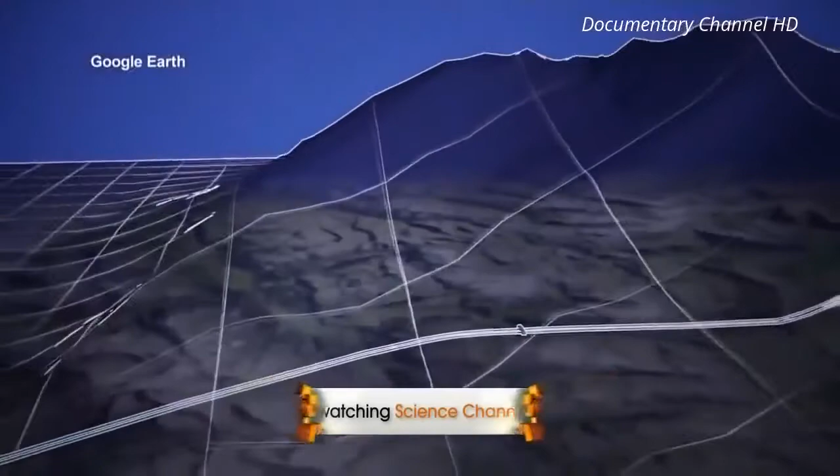My name is Danny Forster, and this is Build It Bigger. I've spent years traveling the globe, investigating some of the world's most important construction sites. But right now, I'm going to take you 6,000 feet under the Swiss Alps into the world's longest tunnel. The Gotthard Base Tunnel, the most ambitious tunneling project ever attempted, cutting 36 miles through one of the world's largest mountain ranges. Two teams are working through one of the most dangerous geological zones on the planet.

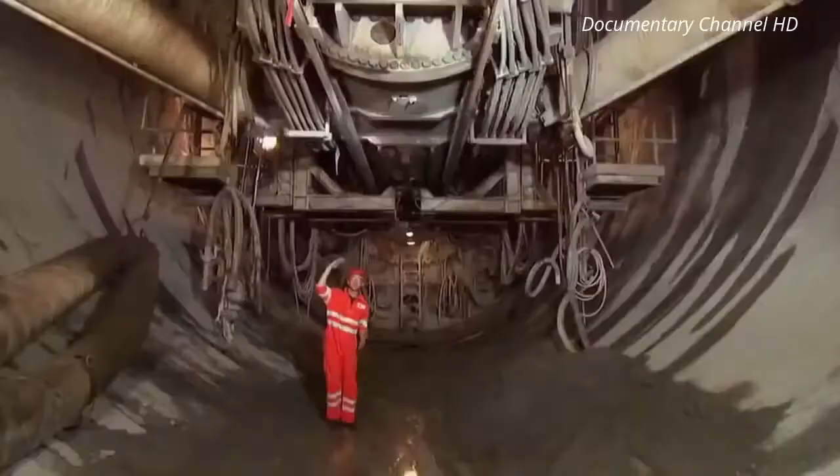If you encounter some bad geology halfway through, it's not like you can go around it. No, you have to go right through. On the one hand, tunneling with one of the biggest machines ever built. A 30-foot tall drill bit that is mining right through the earth. And on the other, blasting through 7,000 tons of rock each day. All right, so the charge is in, and we're gonna blow the crap out of this wall.

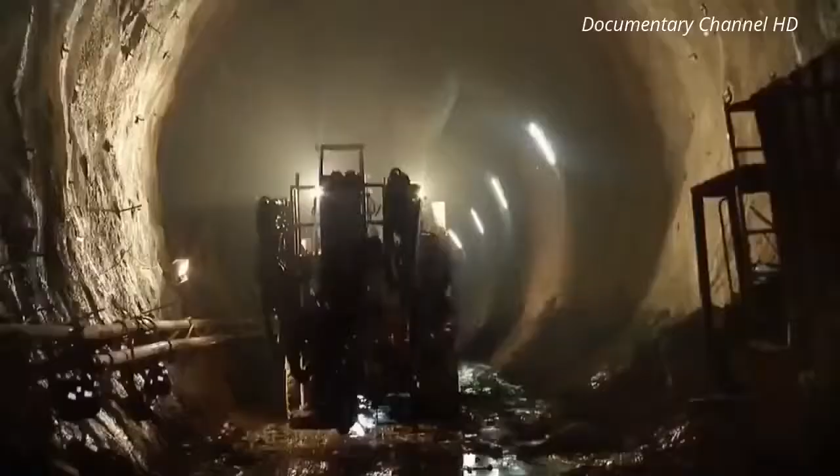After 12 years and 34 miles of digging, they're just 4 months away from the final breakthrough, revolutionizing transit through the Alps forever. I'm in Switzerland, famous for its handcrafted timepieces, milk chocolate, and political neutrality. But more importantly, Switzerland is the geographic epicenter of Western Europe. 2/3 of all freight sent between Northern Europe and Italy is transported through this tiny country, just half the size of the state of Maine.

But despite its convenient location, Switzerland is a geological anomaly. Over 65% of the entire country is covered by the second largest mountain range in the world, the Alps. With soaring peaks over 15,000 feet high, the Alps form a 700-mile-long barrier between northern and southern Europe. And at present, the only way to get from one side of the country to the other is up and over the mountains.

To scale the Alps today, trains climb over 5,000 vertical feet, slowly weaving through sharp curves at just 40 miles an hour, a quarter of their top speed. This steep route also forces trains to operate at half their capacity, despite freight demands growing by 75% each year. With Switzerland becoming the economic conduit between northern and southern Europe, there was an absolute need to find a way to not go over the mountains, but right through them.

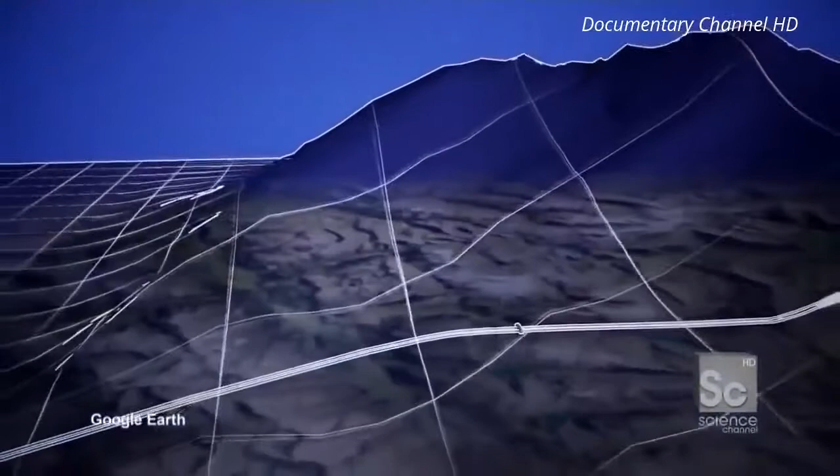Switzerland has launched the most ambitious tunneling project ever attempted, 6,000 feet under the Alps. The Gotthard Base Tunnel will be the longest in the world, stretching 36 miles from one side of the Alps to the other, more than 4 miles longer than the tunnel connecting England to France. When complete, the tunnel will consist of 2 parallel tubes, each 30 feet in diameter. Soon, high-speed trains will cut straight under the base of the Alps for the first time ever, doubling the current freight capacity and dramatically changing transportation through Europe.

I mean, it's more than just making freight move more quickly. Exactly. Alps and mountains are part of the Swiss identity, but it's something that blocks us from the south. And for centuries, people have looked to have a fast way through the Alps. And it's not only about transportation, it's also a cultural exchange.

It brings regions together. To build this revolutionary route, 2,000 workers have excavated 24 million tons of material, enough to build the Great Pyramid in Egypt 5 times over. After 12 years and 34 miles of digging, the tunneling teams have just 2 miles left to go. They'll meet up under the deepest part of the Alps, 6,000 feet below the surface.

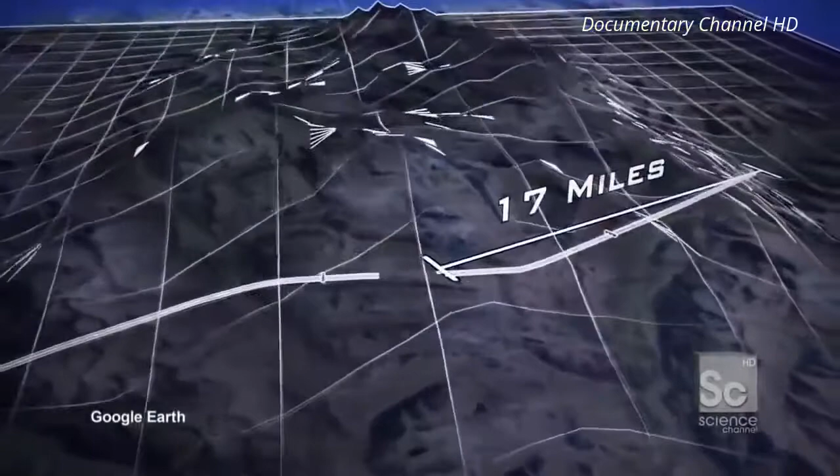And today we're headed 17 miles from the southern entrance, where one team has encountered some of the hardest rock on Earth. Now we're about to begin a 45-minute journey in that train, deep into the tunnel, to the very active edge of where the tunnel's happening. It's kind of freaky, really. Okay. And we're off.

Tell me about where we are in the tunnel relative to where we are in the mountain. We're now basically under the main ridge of the Alps. The pressure from the mountain overhead creates one of the toughest rocks in the world, granite. 6 times harder than concrete, it's what's slowing down the tunneling team. So the length of the tunnel, the height of the Alpine mountains, the rate at which you have to build that, all of that has come together to sort of create a situation that's unprecedented for tunneling.

Yes, the challenges that we had here on this project will actually probably never happen again. No one's been at these depths in the Alps before. No, I mean, we never know where we're going. We're like astronauts. We're putting our foot every day on a rock where no one has ever been before. Well, after about a 45-minute train ride, it's time to go to work. All right, we're here.

So although it's a little bit hard to tell, although it looks like I'm on some big metal rig, this is the TBM. This is the tunnel boring machine. This thing is 1,200 feet long from the back to the front. And essentially, this is what it's all about. A 30-foot tall drill bit that is mining right through the earth. One of the biggest machines on the planet.

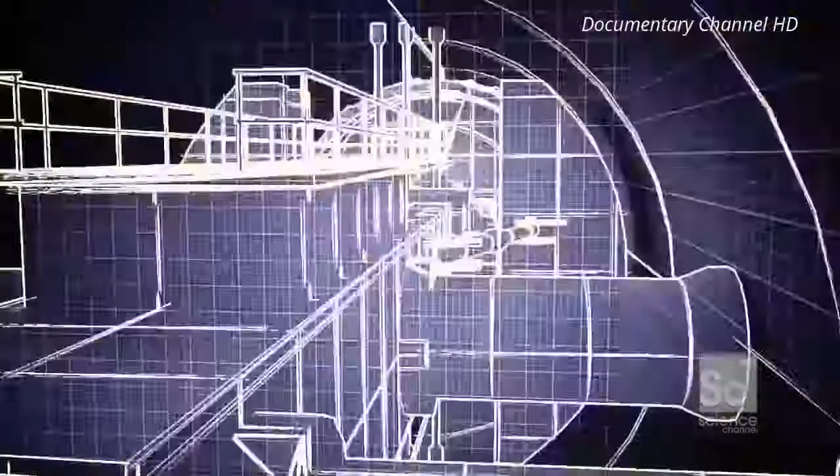The TBM is a 3,000-ton drill as long as 4 football fields. It bores through the mountain with a 30-foot tall rotating cutter head that pushes against the tunnel face, crushing the rock, advancing the tunnel an average of 90 feet a day.

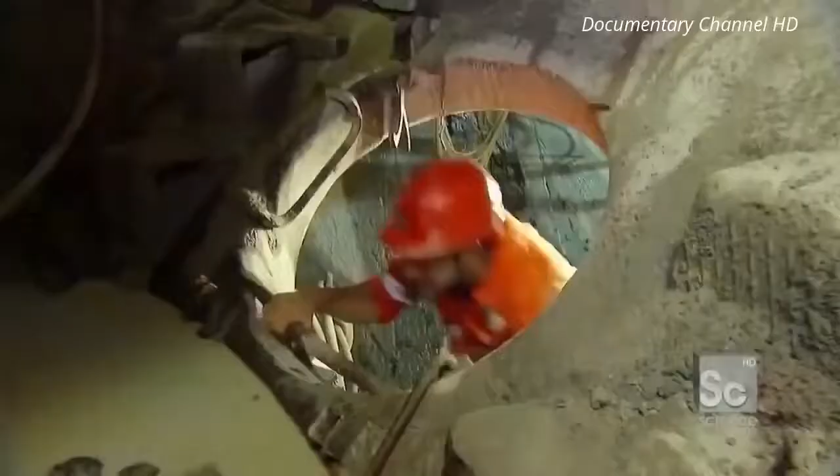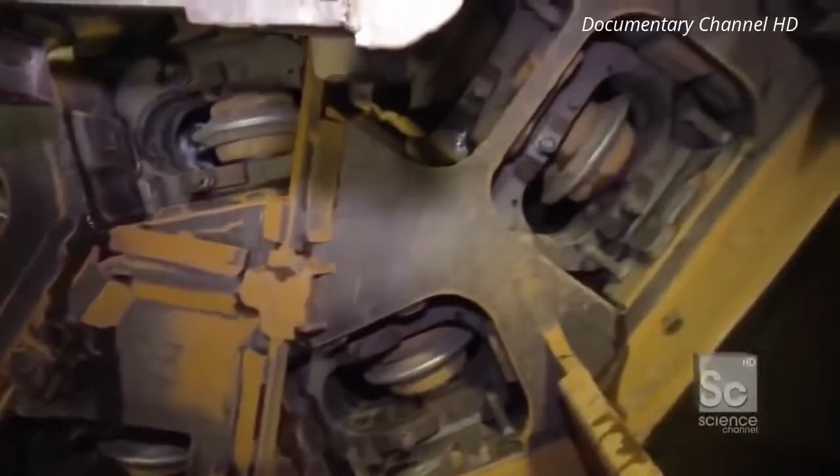All right, so now I'm actually inside the chamber, directly behind the cutter head, and if you look right over here, those are the cutters. Those are the actual rotating devices that are making contact, physical contact, with the front of the tunnel. The 66 disc cutters located at the front of this TBM shear off more than 7,000 tons of rock each day. They've been boring through the granite for 18 hours straight, and they've become worn down.

Now, if the sharp edges are worn more than an inch without being changed, it can slow the TBM from a maximum of 120 feet a day to just 9. The crew has to repair this battered cutter head before they can continue drilling. The question is, have they been worn out? Do they need to be replaced? And the man who can figure that out is Martin.

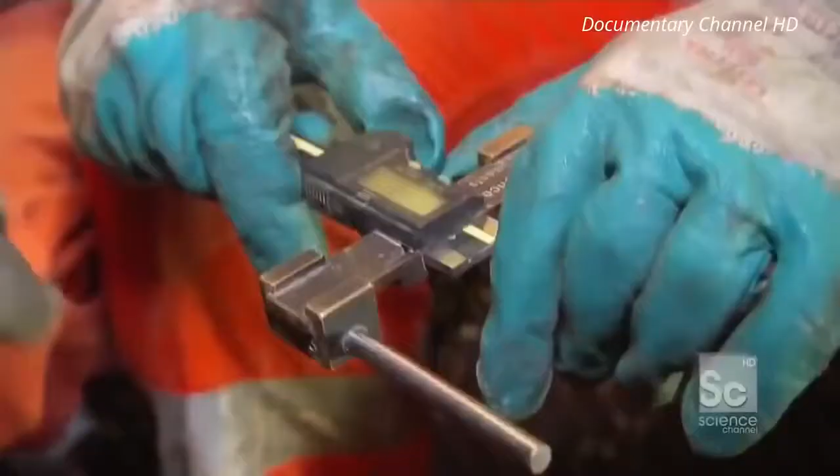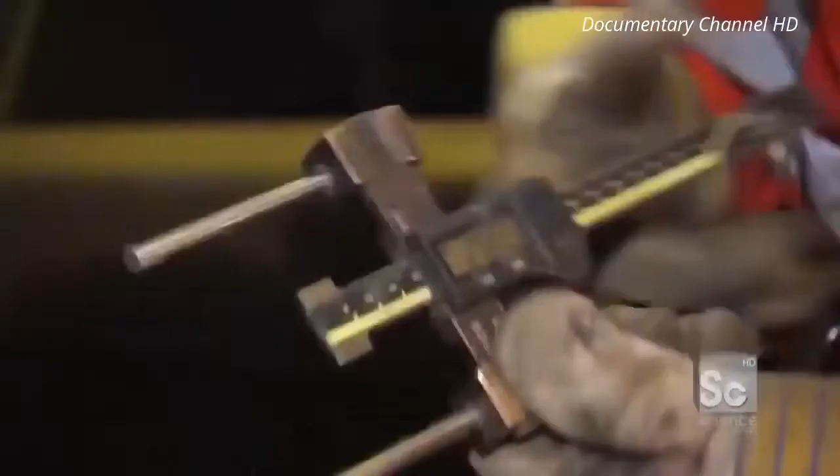Martin uses a specially designed caliper to measure how much of the cutter has been eaten away. If the reading is more than 25 millimeters, then the cutter's been worn down too much and has to be replaced. Myself and Martin are gonna climb into the cutter head, 30 feet tall, measure all 66 cutters, and find out what has to go, what can stay to get this machine back to mining. Not much below me. Good.

All right. The cutter head is as tall as a 3-story building, pushing through the granite with 26 tons of force. Look at him down there. The cutters wear down after less than 12 hours of drilling, 10 times faster than in softer rock. I'm going in to help you, Martin. Stay there, Martin, don't you worry. 16.3. Martin, how are you? Fine. You're good? We're now in the bottom of the cutter head.

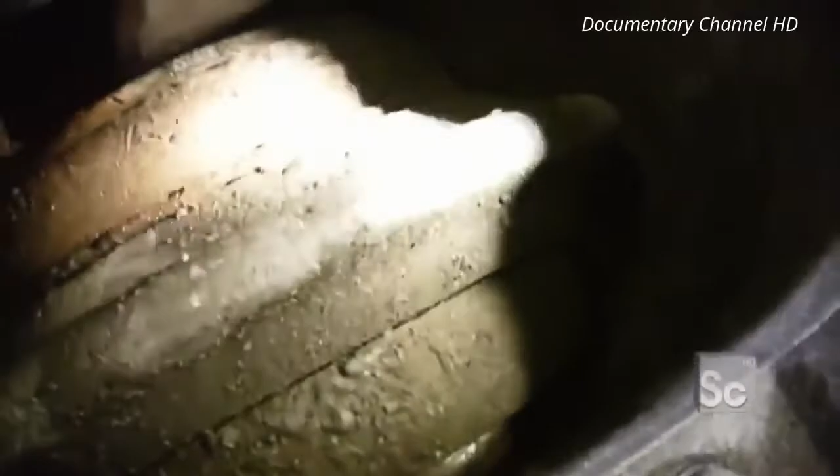I'm actually at the very underside of this 30-foot disc, and what we're here to check out is right there. There's the cutter right there, Mark. So let's measure this cutter head. All right, so now look, as the caliper extends, this is the whole point here. We look at that number, it's 18.3 millimeters, which means this cutter head of the 66 can remain on. To the next cutter. How much?

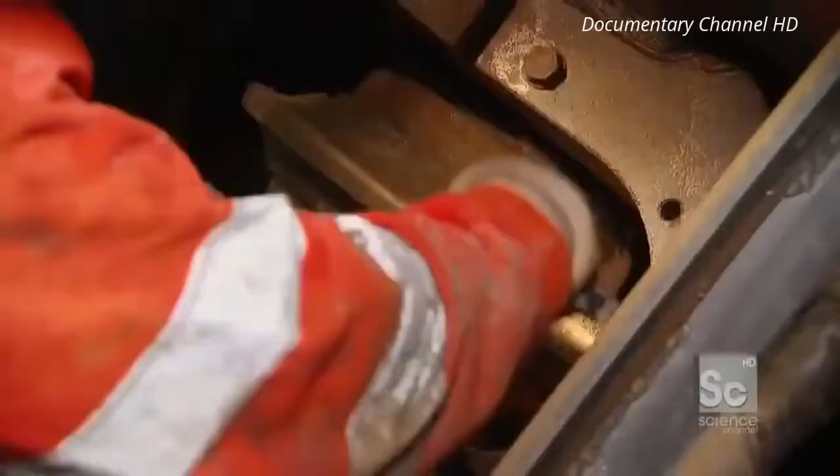4.8. 4.81, so we like that. That one's good. Next. 7.1. 7.1. Also an opportunity for joy. It's okay. It's pretty good, though. 7, it's good. Happy. This 20 good. Very good. I guess really when you're dealing with 66 different cutter heads, it's hard to get excited after each and every one. After measuring, we found that 3 of the cutters need to be replaced before the TBM can get back to work.

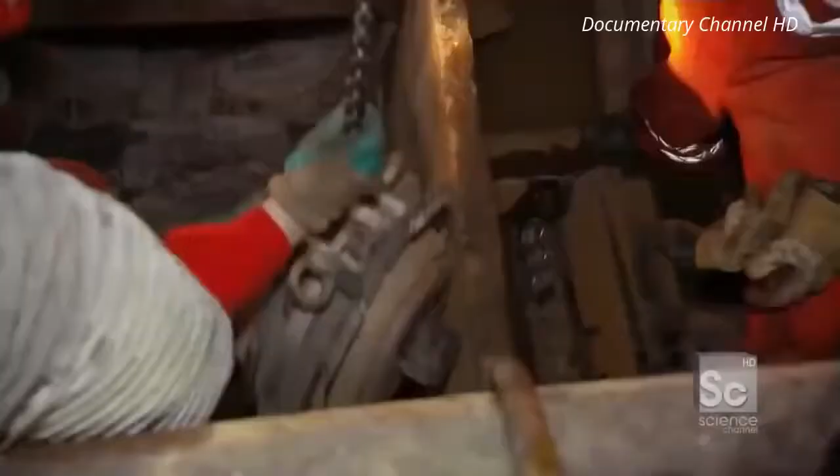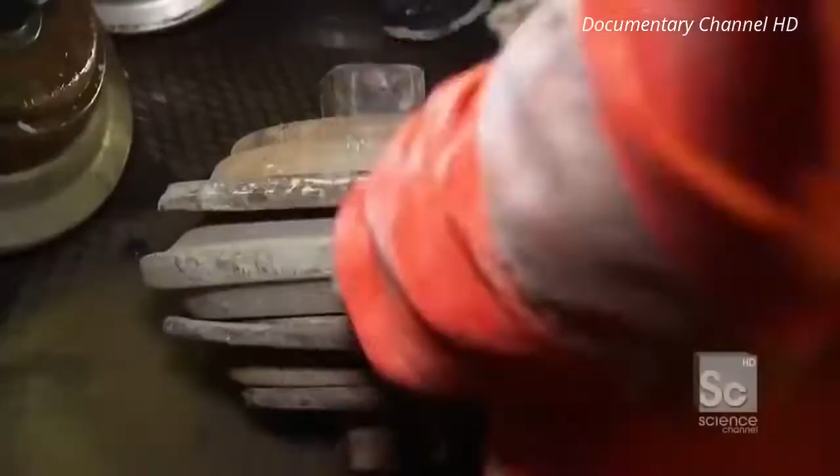So essentially what Martin's doing right now is taking out the old cutter head. Auf. Here it is. There it is, he's got it. There goes the old cutter. Over the course of the project, Martin has replaced more than 10,000 cutters. Each one is made of 300 pounds of solid steel, so the crew uses a hydraulic crane to maneuver them into position.

All right, and so this right here is the cutter. You'll notice the steel is at its full length, so this is the new stuff. Gotta get the old stuff out. It's basically like changing a tire, a very heavy tire. You know what I mean?

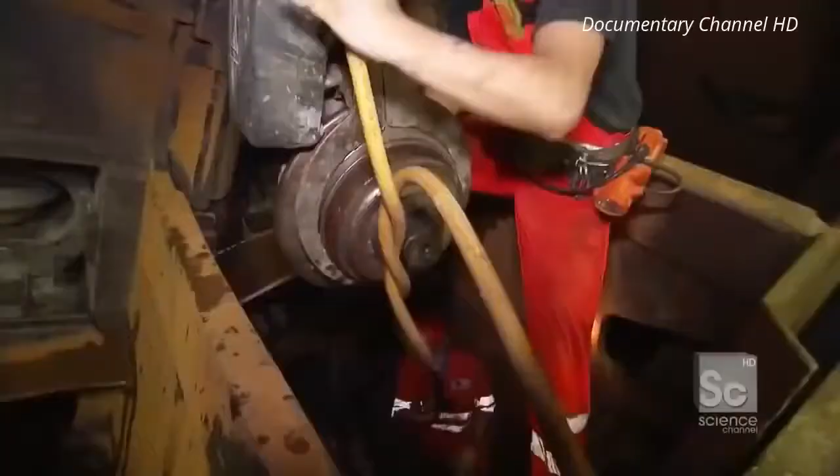So we've swapped the old one out. Next step is bringing the new one. And now it's about getting it to fit in the hole, which seems to involve Martin's feet. There it is. Nice. So he's generally gotten into place. He's now using a pry bar to wedge it over.

The cutter is specifically designed with just 2 bolts for fast installation, even in awkward locations.

Now Martin's shooting. Martin is now fully actually making the show by himself. Nice. Martin's now photographing his own work. Pretty good stuff. Martin, as far as I'm concerned, you shoot it, and then I'll do all the work.

It's incredible that there's 66 of these things, and you can imagine they're getting worn down constantly. And this is what it takes to just change out one cutter, in one unfortunately inconvenient location. All right, so the old one was taken out. Yeah? The new one is in.

Finished? Let's finish. You did good. You did good. You're a fast man. And now, thanks to his nimble hands and sort of perspicacity, this cutter head is ready to get back to work and start building this tunnel again.

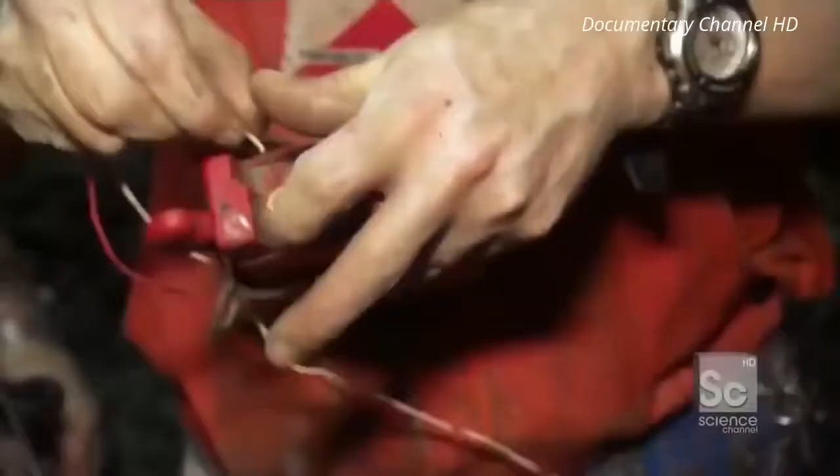Coming up, using 1,000 pounds of explosives to blast through one of the toughest mountains on Earth. This is like full-on, should I cut the red wire or the white wire situation?

The Swiss are known for being incredibly precise, whether it's their handcrafted timepieces or their famous train system, which, by the way, I can personally tell you, departs and arrives exactly when they say it will. And they're going to need that level of accuracy because the tunnel they're building is not just the longest in the world, but it also has to accommodate some of the fastest trains ever built.

Trains will pass through the Gotthard Tunnel at over 150 miles an hour. And at these speeds, even slight curves could cause a derailment. For tunneling teams on either side, this means digging a direct route through 36 miles of rock and meeting at an exact point 6,000 feet under the Alps.

I mean, how accurate do you need to be? We have a tolerance of 12 centimeters, which is this much, that we can use to meet. It's like a bow and an arrow, and you don't see the target, but you still have to be right in the target, right in the middle point. It's incredibly close, and you're shooting an arrow essentially blindly over a trajectory of miles. Yes. It's about 1.5 miles still left, yes.

And what I find to be so amazing is that you have a set beginning point, you have a set end point. If you encounter some bad geology halfway through, it's not like you can go around it. No, you have to go right through, and that's the main goal of this tunnel. You cannot change the geology.

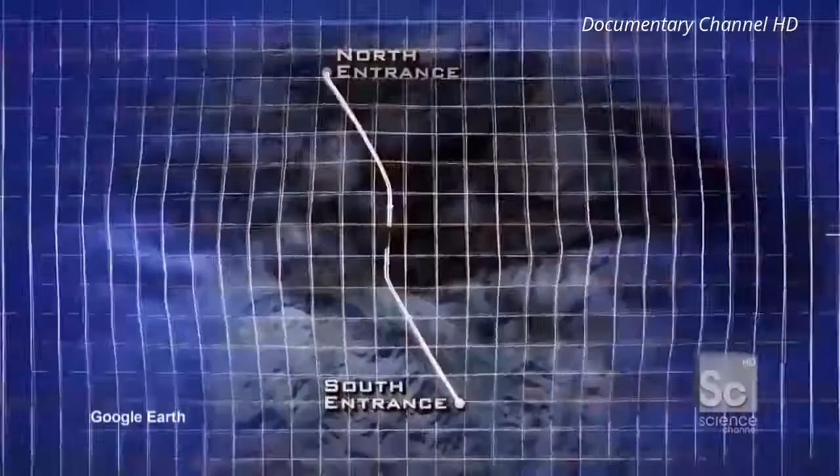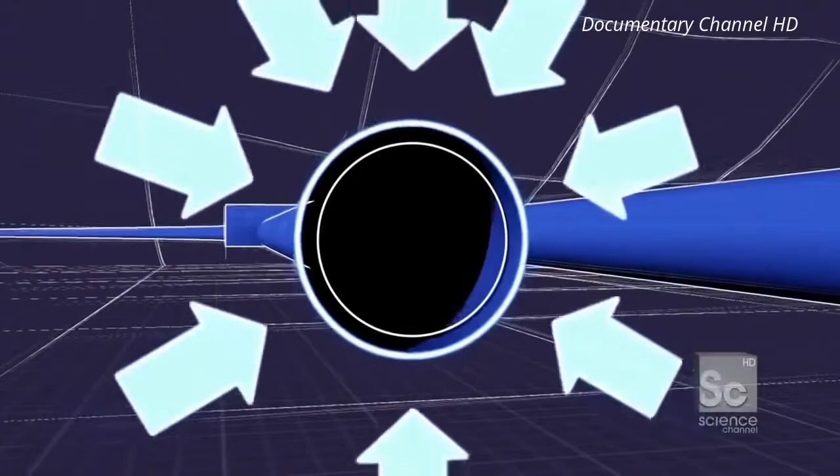Blasting away the rock is 10 times slower than using the TBM, but it's the only solution that'll work in this volatile area. The mountain's enormous pressure creates a squeezing effect, shrinking the tunnel's diameter by almost 3 feet, making it too small for future trains. Now, to prevent this, they're blasting a 3-foot wider diameter tunnel, allowing the rock to naturally squeeze down to the right size, matching the other side.

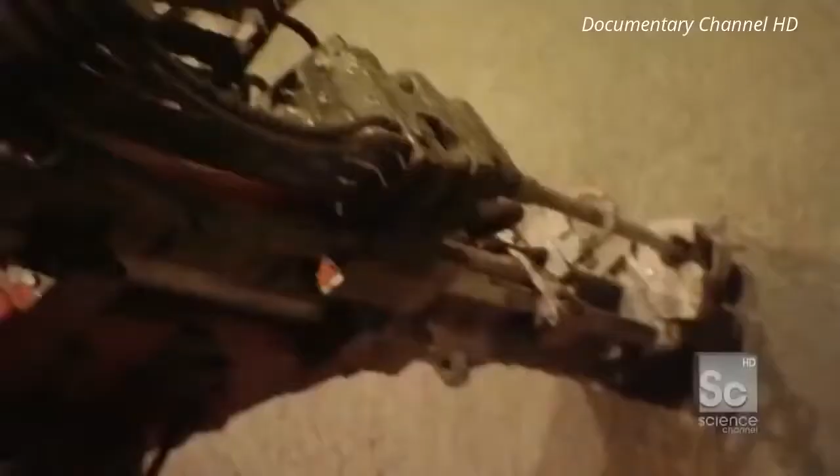So this thing is called a 3-boom Tamrock. Essentially, 3 different drill bits that can put as many as 120 holes into that wall. These holes are filled with ammonium nitrate, a liquid explosive that blasts away the rock, advancing the tunnel 9 feet at a time. Coming up.

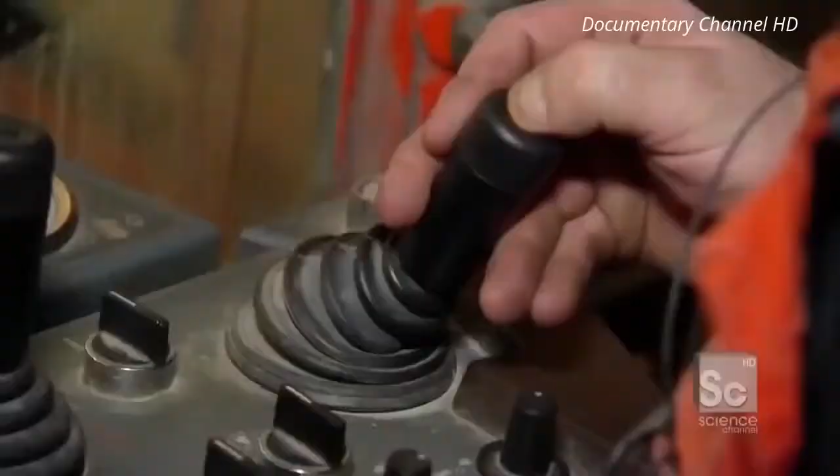Okay, so now I'm inside the cab of the 3-boom Tamrock, and it's this thing and this man right here that are actually driving this thing and supporting this rock face.

How are you doing? You're smoking. That's good. Because we're in a confined space in a tunnel with very little air. So you do? You're both smoking.

So actually, if you look here at the computer screen, it sort of sums up what we're up to. This is a cross-section of the tunnel right in front of us, and the goal is to locate 120 holes on this face and drill those holes, filling each one with explosives so we can push that wall out and grow the tunnel.

Are you smoking back there? This guy loves to smoke.

To precisely control the diameter of the tunnel, a surveyor pinpoints the location of each hole within an inch, evenly distributing them across the rock face. All right, so at this point, we're almost done. Almost all of the 120 holes have been drilled, and the next step is to load them, or in other words, fill them with liquid explosives.

So you can see the charge right here, right? It's essentially a small little bomb in my hand, and I'm gonna stick this in the very tip of my hose, right? We're actually going to shoot this hose with the liquid explosives and push this charge into the very back. Therefore, when the blast goes off, this charge will actually accelerate the blast, loosen more rock, and get us those 9 feet we need.

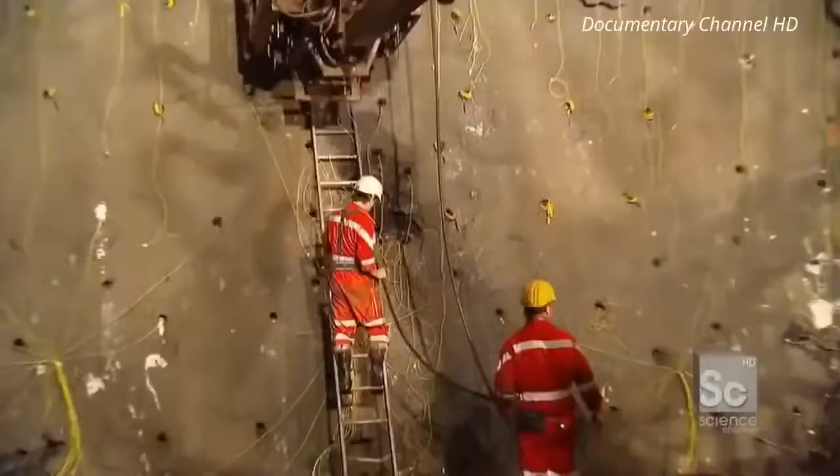The charges are tied together and timed within milliseconds for maximum control, starting at the center and radiating out. The last charges to explode are at the bottom of the face, loosening up the pile of debris, making it easier to remove. The last thing to do is to take, if you look right here, the fuse that's connected to every single one of the holes, connect that to this right here, all the explosives getting tied together with this last piece of, well, yellow electrical tape. You would have thought it a little bit more sophisticated at this point, but that's it.

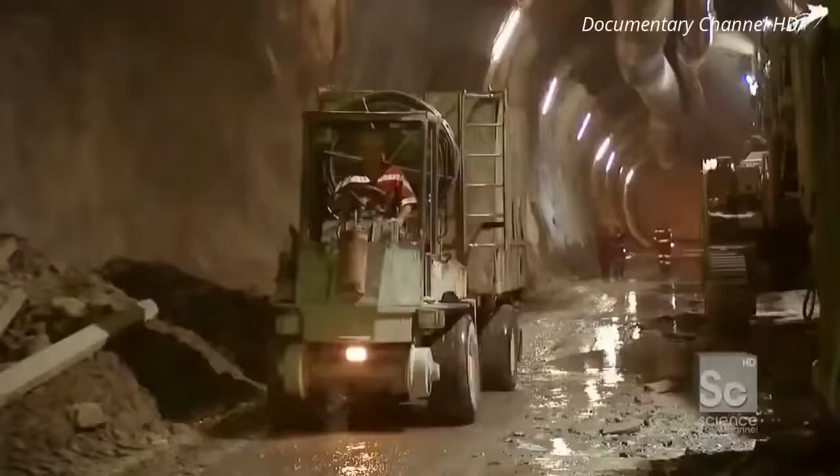With the fuse connected, the explosives are live. The team retreats 900 feet up the tunnel to clear the blast radius. When the multi-million-dollar equipment starts to get backed out of the way, you know it's time to go, so we're there. All the holes are filled, charges are connected, we are done, everyone's evacuating. We're ready to blow this thing up.

All right, so we're gonna hide behind this steel container right here. Now, there should be enough protection, but I wanna make this clear. The blast is happening right over there in a straight line. Okay, that's it down there, that's the end of the wall. So we're not around a corner, we're not hiding far away.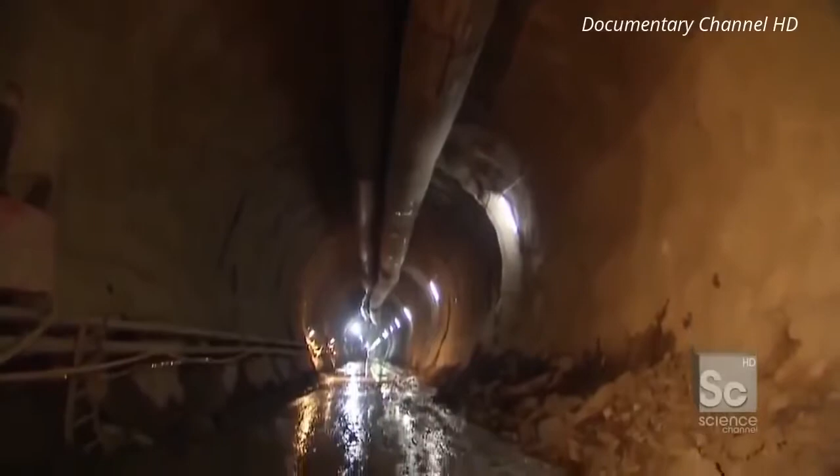The blast puts off superheated ammonia gas. So we have to wait 30 minutes for it to clear before we can check the damage. There's still a lot of residue in the air, so your eyes do burn. Even with the gas mask, it's really hard to breathe. You can feel the ammonia in the air. Well, what do you think? Tip-top. Tip-top. Good? The man is happy.

It'll take the remainder of the day to shuttle all 6,000 tons of debris 5 miles out of the tunnel. Well, look at this. Where I'm standing right here, 15 minutes ago, was a solid wall of tunnel. And now, I'm standing on the residue. The tunnel has been pushed back by 9 additional feet. They're going to spend the rest of the day pulling out the muck and getting ready for the next blast.

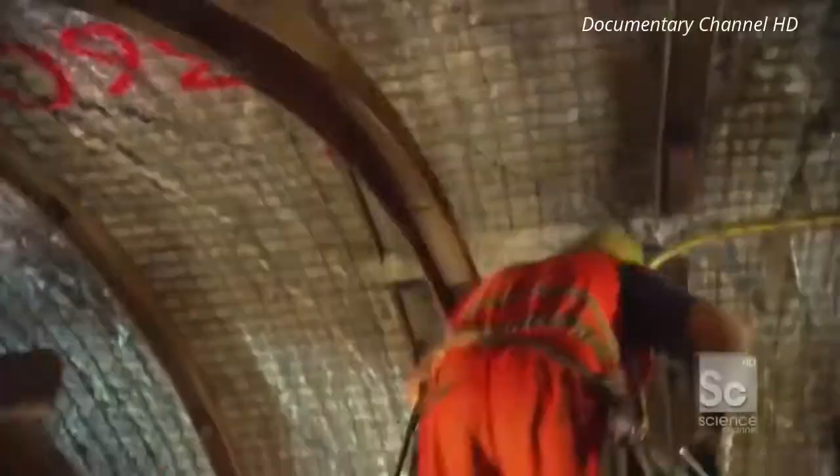Coming up, preventing a catastrophic cave-in with a one-of-a-kind technology. Yeah, it can collapse and fall down, and that's a great problem. That's a big problem. Yeah.

So I'm now driving through the Swiss Alps, one of the largest mountain ranges in the world. And it's complicated. I'm climbing over 5,000 vertical feet, and to do that, you have to negotiate these incredible curves, one hairpin turn after the next. For more than 800 years, people have been searching for a faster route through the Alps, but it just wasn't possible until now. Because to build a tunnel straight through these mountains, engineers had to overcome some of the most complex geological conditions in the world.

Generally speaking, land masses are formed by a series of earthen deposits, one on top of the next, for millions of years. This creates a horizontal stratification of layers. Now, as you can imagine, this is great for tunneling. The TBM goes in on one side and has the same consistent rock type all the way through the tunnel. However, here in Switzerland, things happened a bit differently.

When the tectonic plates made contact, they actually folded upwards, creating a series of vertical stratifications, which make an amazing mountain range, but also make a lot of different geological types. So when the TBM goes into the mountain, it hits one type, and then a second type, and a third, and a fourth, and a fifth. Multiple different problems requiring multiple different solutions.

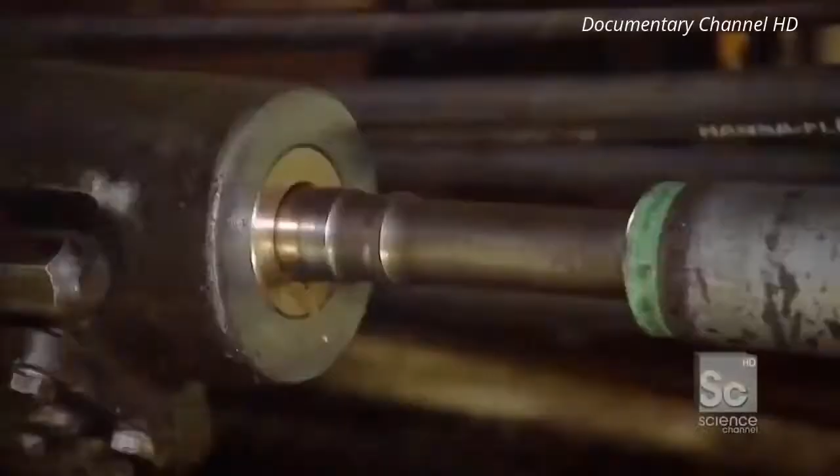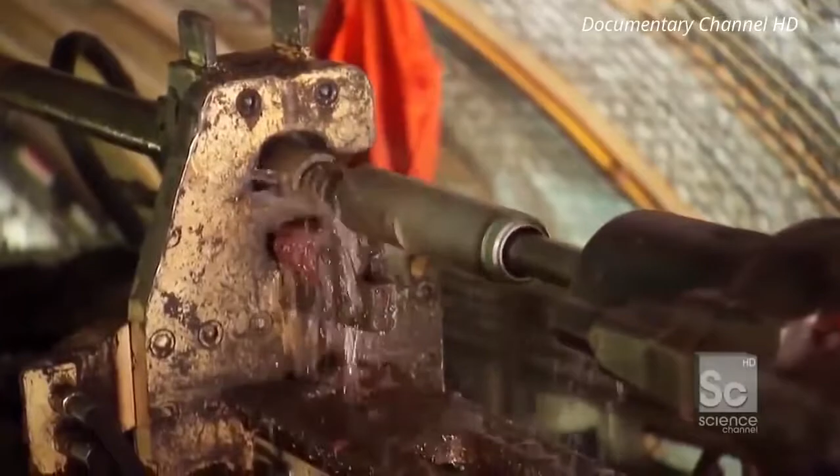Now, the way they're doing that is with something called the exploratory drill. The drill literally feels its way through the rock 360 feet in front of the TBM to find out if it's hard or soft. If the rock is too soft, there's a high chance it can cave in while drilling, burying the $30 million TBM and the men working on it thousands of feet below the Alps.

So, for example, if the drill steel goes right into the rock very quickly, you know it's soft. Exactly. But if the drill steel has to fight its way through, yes, you know it's very hard. Yes, we stay also here with our eyes of geologists, not only with digital data, to look at the rods, how they behave. You have to actually see, feel, understand the rock.

Yes. Because in reality, you're still working blind. I mean, you never actually see the rock, but only you see the way in which things interact with the rock. Exactly. It's easier today to look at the surface of the moon than to know exactly what we have 10 meters inside this rock mass.

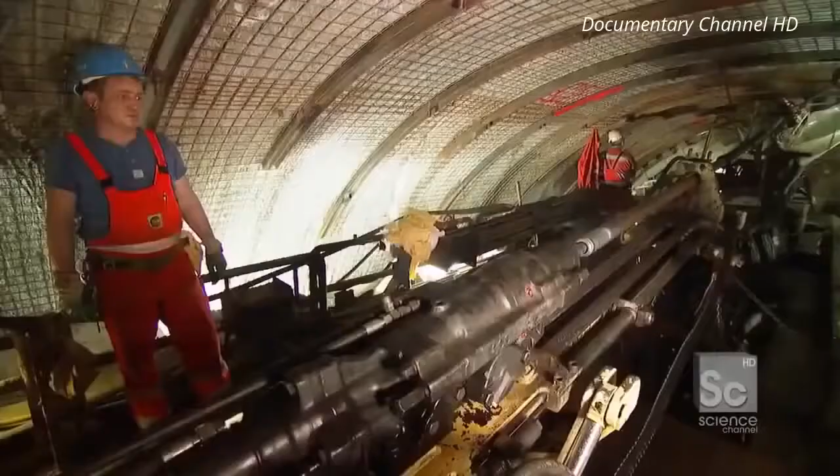To probe 360 feet into solid rock, the drill is made up of 36 10-foot-long sections joined end to end. So as you can see, what we're going to do is clasp that on, tighten it up, lock it in. So in doing so, we've added a new piece of steel, creating one long 360-foot probing stick that tells us what's happening out in front of the TBM. So the man who's actually controlling the drill and the force he applies to each subsequent piece of steel is right here. Ralph.

Guten Tag. Guten Tag. I'm Danny. Oh, yeah. Nice to meet you. My English is bad, sorry. My German is terrible. Okay. I started and you... Perfect.

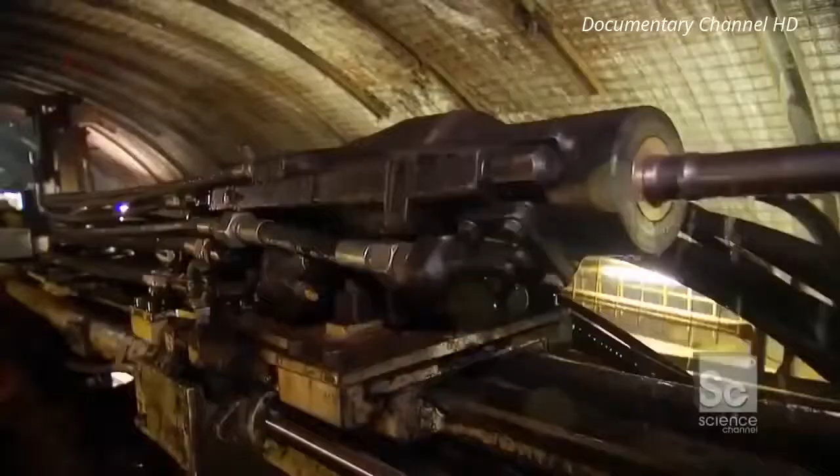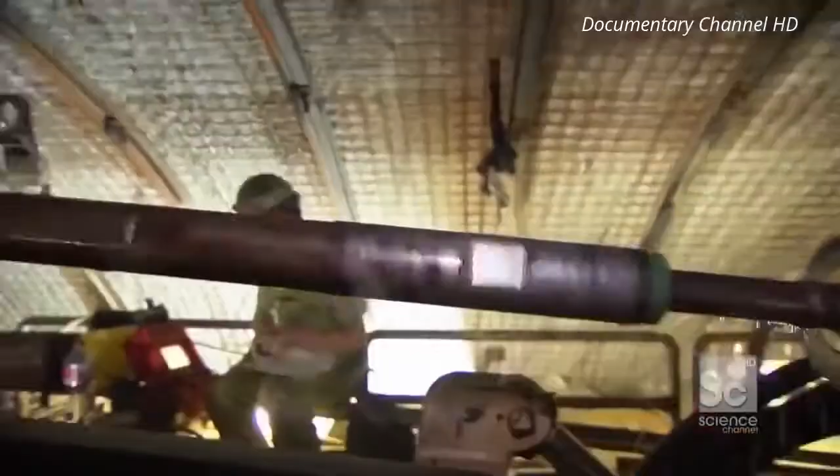So Ralph's just turned the drill on. He's going really slowly right now to get a sense for how much the rock is pushing back. As he takes his readings, he slowly increases the power. A computer records how much force it takes for the drill to cut through the rock, giving geologists a sense of what's in front of the TBM.

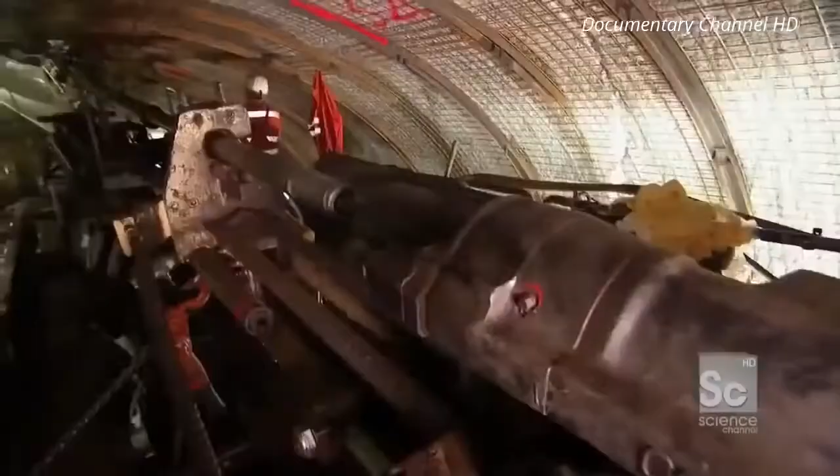So as you can hear, I just increased the pressure, which means the rock is actually pushing back. Which is good news, because the soft geology, we might be through it and actually into some good, solid, hard rock. Good rock. I like it.

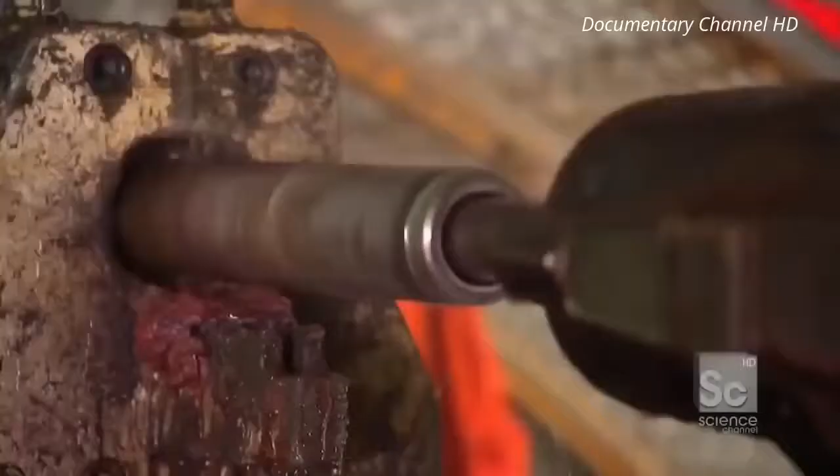About 100 feet in, the drill hit good, hard granite, but it also revealed that the first 100 feet were much softer than expected. If it's too dangerous to drill through, they'll have to stop the TBM and manually blast through the danger zone, adding 5 months and $10 million to the schedule.

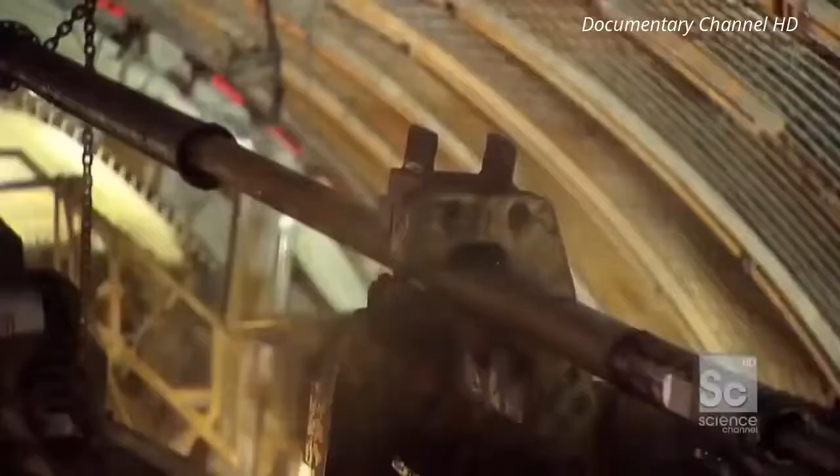So tell me about what was discovered during the exploratory drilling. Yeah, through the drilling, we find out some very, very soft material. And so now we're very nervous of the situation. If this were soft rock, what could happen? Yeah, it can collapse and fall down, and that's a great problem. That's a big problem. Yeah.

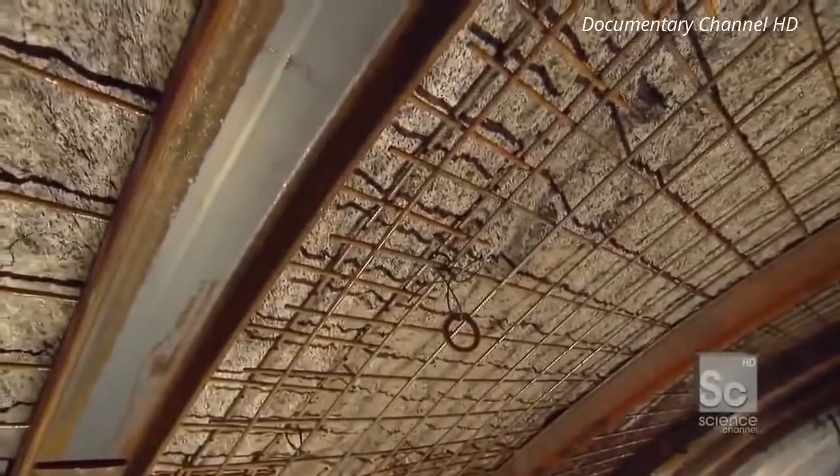To find out if the TBM can safely move through this soft rock, geologists are doing a rare secondary exploration, using an endoscopic camera to peer into the mountain. And you don't do this very often. No. But in the moment, we have a very special situation. So we use this camera thing. It's just the second time or third time ever.

And so what do you hope to see by putting the camera in there? We hope to see just a small band of the soft thing. So that was good. But we don't know.

The camera shows the physical structure of the rock, information the drilling can't provide. So this is it right here. Wow, that's amazing. So essentially, they have an endoscopic camera attached to the end of this blue thing, and they're going to stick this camera in a pre-drilled hole about 150 feet out that will tell them exactly, by eye, what is happening in the rock. And I've always wanted to do this.

That's not the tunnel, that's my mouth.

Geologists look at the pattern and colors of the rock for clues about its structural integrity. If you look at that screen right now, what you're able to see is exactly what geological condition we're going to experience 150 feet in front of where we are right now. This is like that scene in Star Wars when the monster came out.

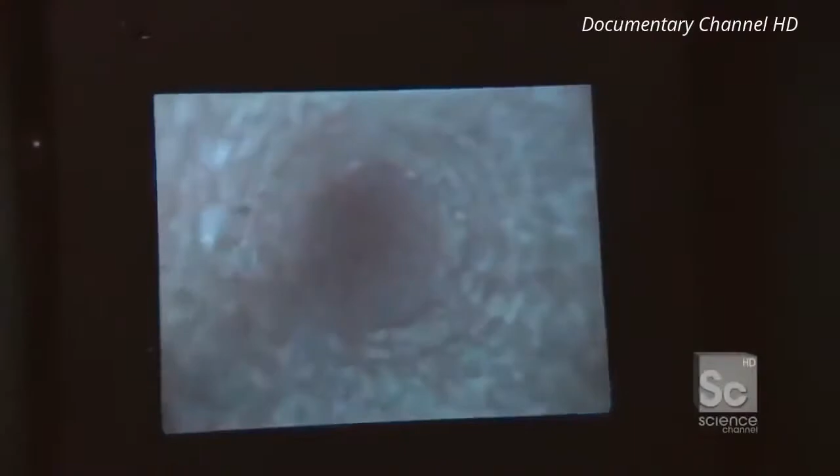That's good news, yeah. The footage shows that despite its softness, the rock is structurally sound, and the TBM can safely bore through it to get to the hard rock. So if this rock is good, that means that rock out there is also good. Yeah, absolutely. So as a geologist, does that make you smile? Yeah, I smile. That's a good rock.

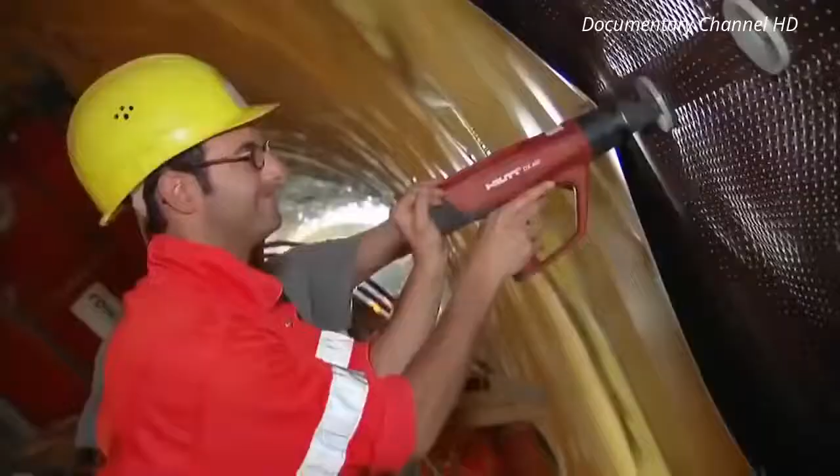That's good rock. Coming up, preventing a major train derailment with a drainage system designed to stop thousands of gallons of water. This can't be the easiest way to do this. But first, who holds the record for the longest tunnel in the world? The answer after the break.

The answer to the trivia question: currently the Seikan Tunnel in Japan is the longest in the world at 33.3 miles.

The Gotthard Base Tunnel gets its name because it cuts through the base of the Alps more than a mile below the peaks. Now, while this depth creates a fast, flat route, it also puts the tunnel in danger, not only from the enormous pressure from above, but also from the large quantity of water inside the mountain. The Swiss Alps, if you think about it, are a waterlogged mountain range. There are lakes and streams up top, as well as snow-capped peaks. And when that snow melts, all that water will slowly percolate through the mountain and ultimately come down into the tunnel, rusting the steel and eroding the concrete.

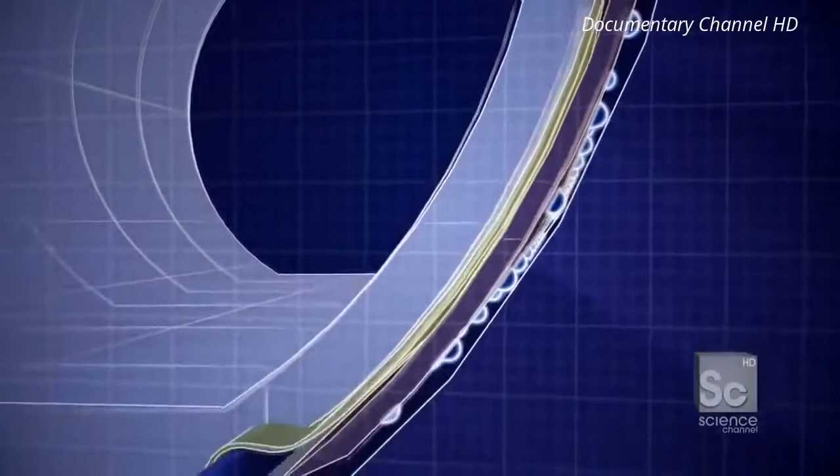No chance. This tunnel has one of the most advanced tunnel drainage systems ever made, hidden behind the tunnel's concrete structural wall. A thin sheet of yellow polyethylene actually creates the watertight seal. Under that, a thicker layer of plastic protects the waterproofing from the tunnel's rough walls. Finally, small spacers create a half-inch gap from the rock face, allowing water to flow down into a drainage pipe. And the key to the entire watertight system: installing it without any punctures or seams.

And so to make sure that it's solid with no seams or holes or edges, we're going to unwrap this around the entire circumference. Yes. One piece. We found this. There's no problem. All the way around? All the way around. The layers are made from 100-foot-long sheets of seamless plastic. In total, they'll use more than 50,000 sheets to seal the entire tunnel, enough to reach from New York to Boston and back again.

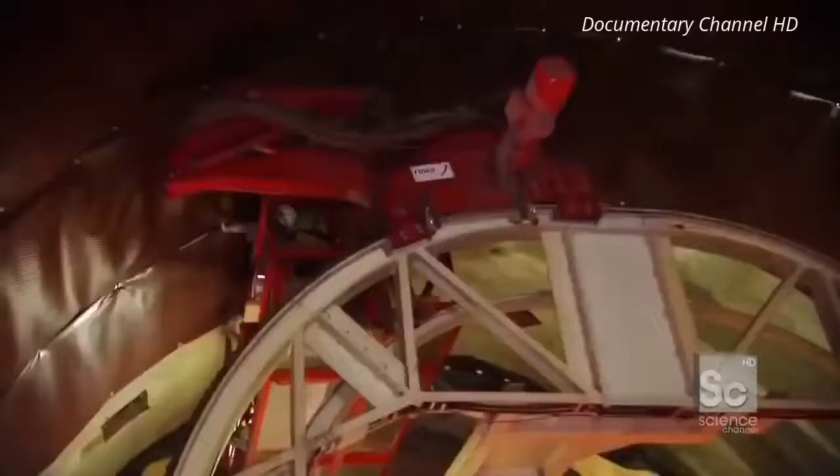Now, one of the oddest things about building a tunnel is that you're working with an upside-down circle, right? And you have to cover every single inch of it. So rather than go up, build some scaffolding, get higher with more scaffolding, they've created this rig that moves 360 degrees around and lets us unfurl these sheets of drainage mat in one single shot. Oh, coming down. Look out. Sorry. The drainage mat is secured to the wall of the tunnel with gray plastic caps.

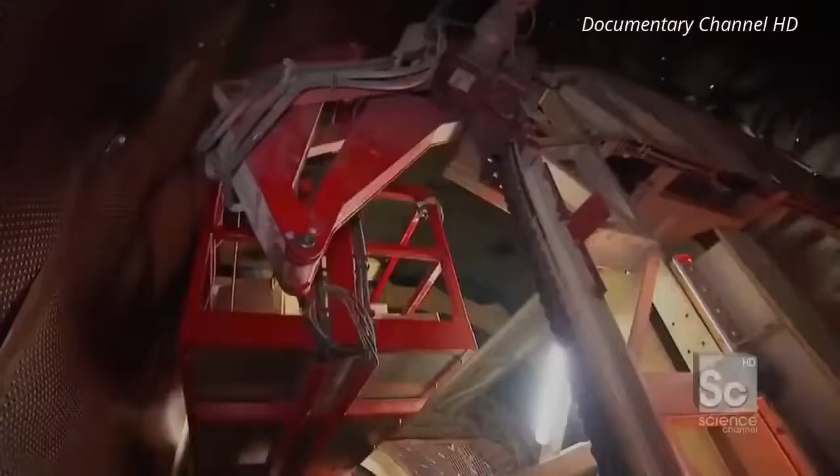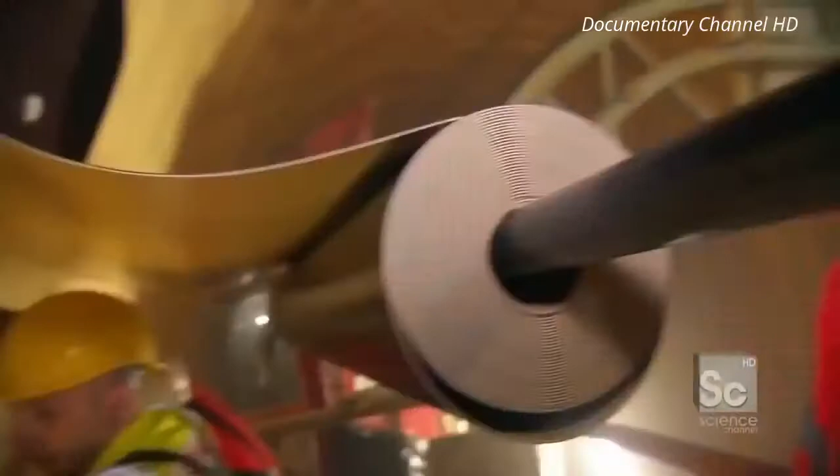There it is. They do more than just attach the drainage mat to the tunnel. These caps are made from the same polyethylene as the yellow waterproofing. And when heated, the plastic bonds together, seamlessly attaching the waterproofing to the tunnel walls. So what Philip's doing right now is taking a heat torch, putting it on the back of the plastic, and melting just a little bit. So there's no tape, there's no nails. He's literally melting the two pieces to form one solid bond. The heat gun, called a hot air welder, melts the plastic at 600 degrees.

We're going up top now, huh? Yeah, give me the heat, give me the heat. So essentially he just put 600 degrees behind me, and now I'm pushing the rubber against it to melt the two, one to the next, and it is burning the crap out of my hand. And we don't stop, we keep moving. We're doing this in one shot. We're moving, we're moving. Oh no. Higher. You gotta be kidding me, why don't you guys wear gloves? This can't be the easiest way to do this. That's just the easiest way. Believe me.

Gunther, what's going on? You're going nuts out here. We've taken one piece, wrapped around the entire circumference of the tunnel to guarantee that absolutely no water gets in. But to do that, it is absolutely madness. Just pure madness. Gunther's team can install up to 10 sheets a day. And with just 2.5 miles done, it's going to take them 2 more years to waterproof the tunnel.

So now that we've done this, essentially, this section of the tunnel, the longest tunnel in the world, has just become watertight. No chance. No chance? I work here, no chance. You did it? Yes, I did. Gunther said no water's coming in. If you believe anyone on this site, and there are some very reputable people, I would believe Gunther. Gunther? Thank you. Thank you, sir.

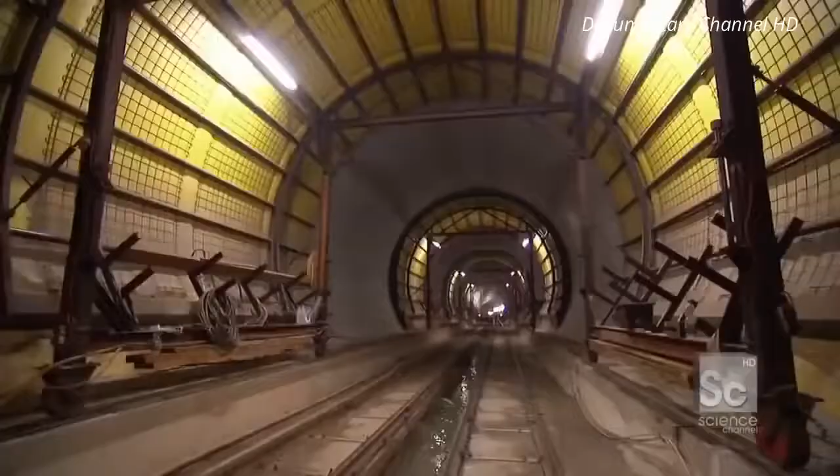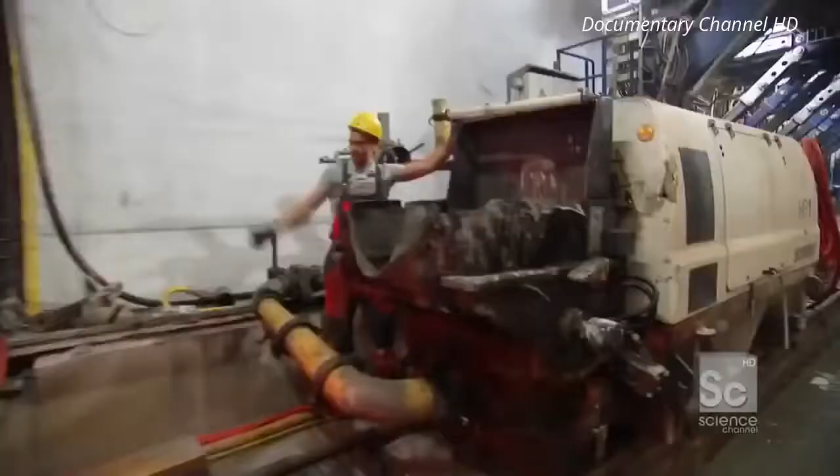Although the water has been contained, the tunnel still faces enormous stress from the mountains overhead. With peaks up to 15,000 feet high, the tunnel is under trillions of tons of pressure and has to have an extremely strong reinforcement to keep from collapsing. The tunnel is now totally watertight. The next step is to give it its strength in the form of a solid concrete cylinder. The way they do that is using this apparatus right here, something called sliding formwork. Basically a 30-foot-long mold, this formwork shapes the concrete into the final structural wall, almost a foot thick for strength.

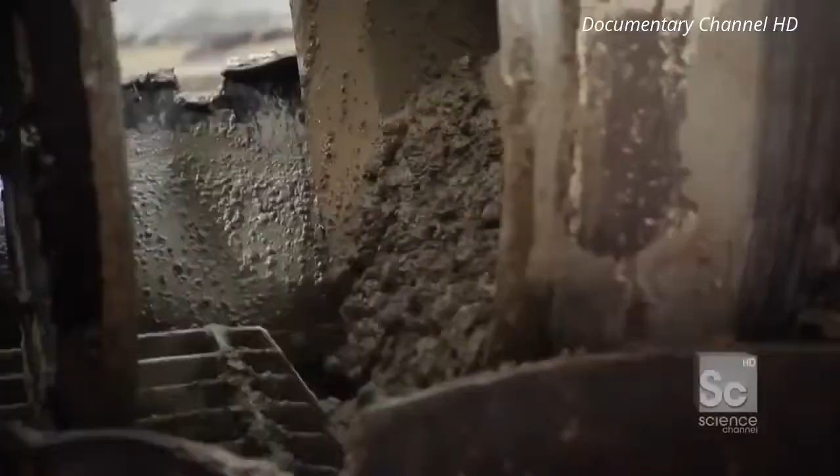All right, here it comes, like that. As he turns that wheel, it's opening up. This concrete is coming out, and we're gonna fill the entire circumference of this tunnel, 30 straight feet of it, and that begins right now with this concrete. Now the concrete is flowing. You hear that each pump. It's pushing the concrete through this tube, up top, and down into the formwork. I'm gonna head up now, where they're pouring the concrete.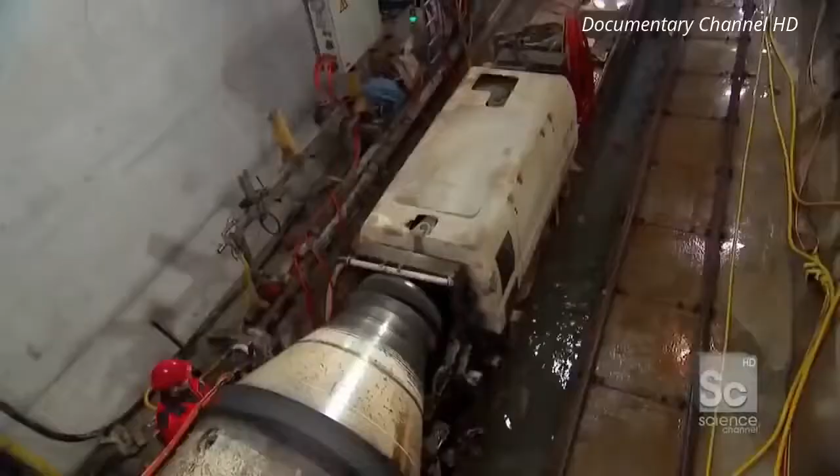The concrete team's biggest challenge is maintaining a uniform density around the whole circumference. If the wet concrete is allowed to naturally settle at the bottom of the mold, the tunnel won't distribute the stresses from the mountain evenly, cracking and caving in. To avoid this, the mold is poured 9 feet at a time and allowed to set for 15 minutes before the next pour, making it strong enough to hold up under subsequent layers.

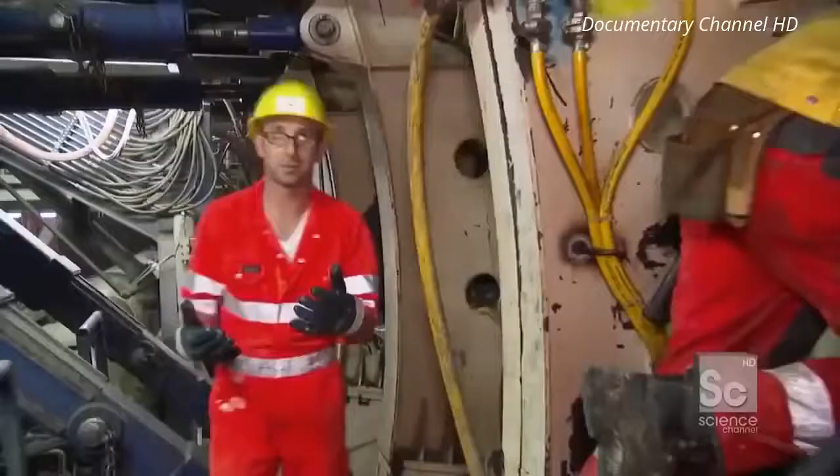But if the concrete pours down, you have no access, except for this. They developed a series of windows, or almost portholes, that open up and allow the guys to get inside and actually vibrate the concrete as it slowly rises around both sides of the cylinder. Can I get in there? Can I look? Yeah? Okay, so where I am right now is actually what will become a concrete wall. This is the outer layer, this is the inner layer of the formwork, and as you can see, the concrete is getting poured in and will slowly rise, filling this 1 foot cavity all around the tunnel.

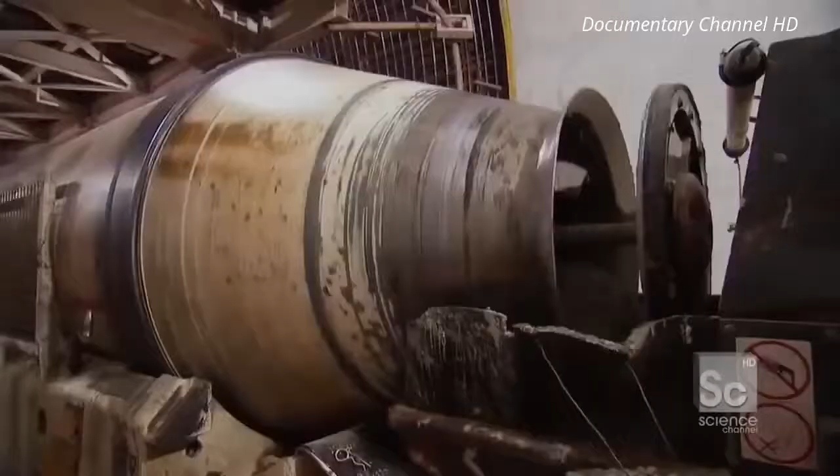The Gotthard Mountain Pass is one of Europe's most important trade routes. And since the 13th century, engineers have been struggling to find a faster way through. People always tried to improve ways through the Alps. First, it was just horses with freight on their back. Then they built a small street. Then the boom came with the railroad. Even 100 years ago, the desire would have been, if possible, to bore right through the Alps, have a straight shot. Exactly. It's just that in the 19th century, the people didn't have the technology to build such long tunnels.

The technology finally caught up 12 years ago when Switzerland broke ground with their first tunnel boring machine. Now, they're just 4 months away from completing the first high-speed route through the Alps. But the TBM has got to stay on course with surgical precision to ensure a clean breakthrough. 17 miles inside the tunnel, the team is gearing up for the final 2-mile push through the mountain.

Get to ride in the front of the train with who I think to be possibly the happiest train driver I've ever met. You're Felice. You're driving the train. Felice is ready. He is happy and enthusiastic about the endeavor. I am too. Not as happy as him. I don't think anybody is. But we're ready to go. Come on, let's do this. Let's do this. I love it. Great. All right, we're going in.

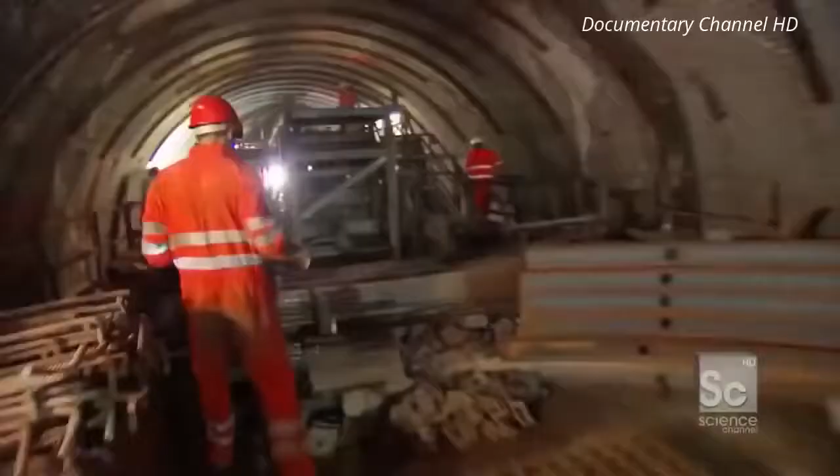After 16 hours of intensive geological exploration of a dangerous section of soft rock, the TBM team is finally ready to begin drilling. Are we here? Yeah. End of the line. In these last 2 miles, the TBM team is facing fault lines and intense pressures from the mountains overhead, making it especially challenging for the driver to both stay on course and avoid a collapse.

Hello, sir. Hello. How are you? Fine. I'm Danny. Yannick. Yannick, are you driving the TBM? Yeah. All of this madness out here, all this driving, and all right here. Yeah. We're advancing right now.

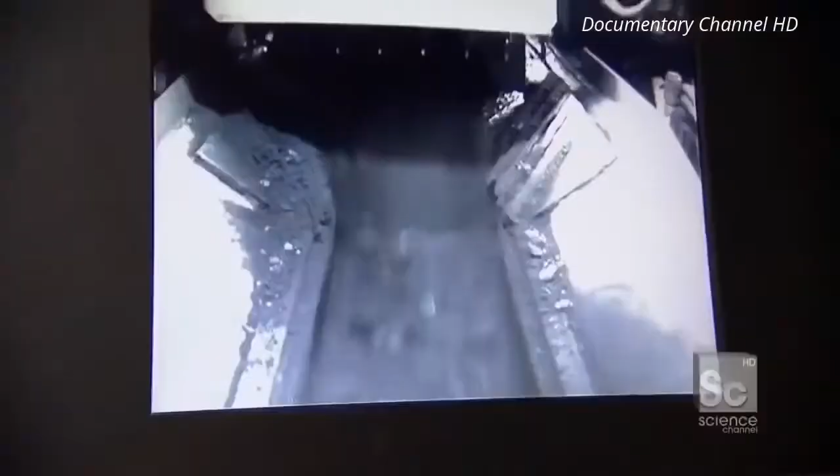So finally, after some time, some very complicated geology, Yannick behind the ostensible wheel of the TBM is smiling because the TBM is mining. We're pushing against the open rock face, and rock is coming out of the cutter head and out of the tunnel. So if you see this, you're happy. Yeah. Super. That's super. Super cool.

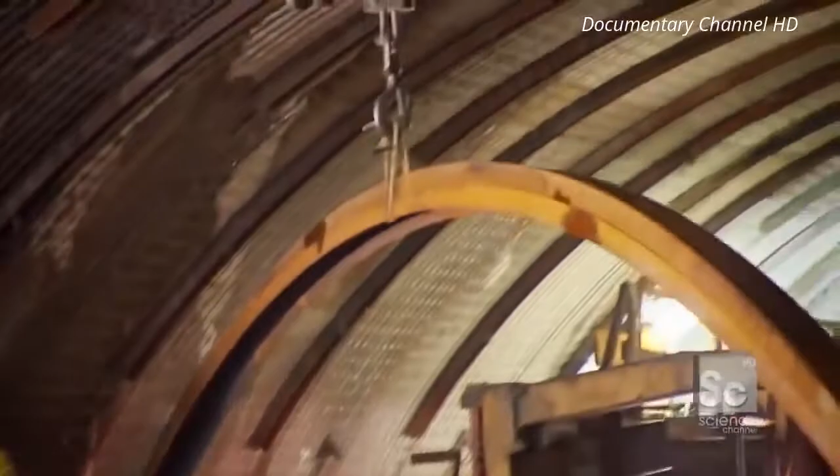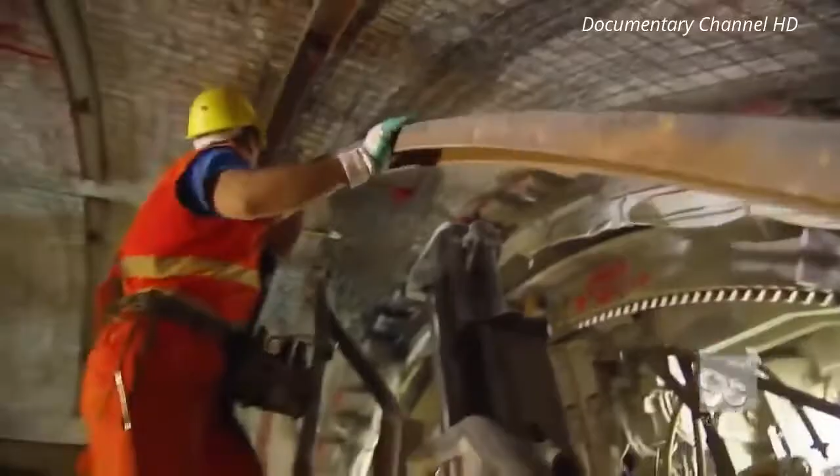As Yannick drives, a team installs metal support beams to keep the tunnel from collapsing. They've got to stay in constant contact to keep the TBM at just the right speed. If the machine moves too quickly, the crew won't be able to put up enough rock supports, leaving the tunnel dangerously weak.

This is how fast we're moving. This is a millimeter. So right now, as we speak, we are moving 53 millimeters per minute. 53 millimeters, so it's 5 centimeters per minute. So that's like a very small amount of distance in a minute. This moves very slowly. Very slowly. As he controls the speed, moving less than 2 inches a minute, Yannick also plots the course to meet the drilling team on the other side of the tunnel.

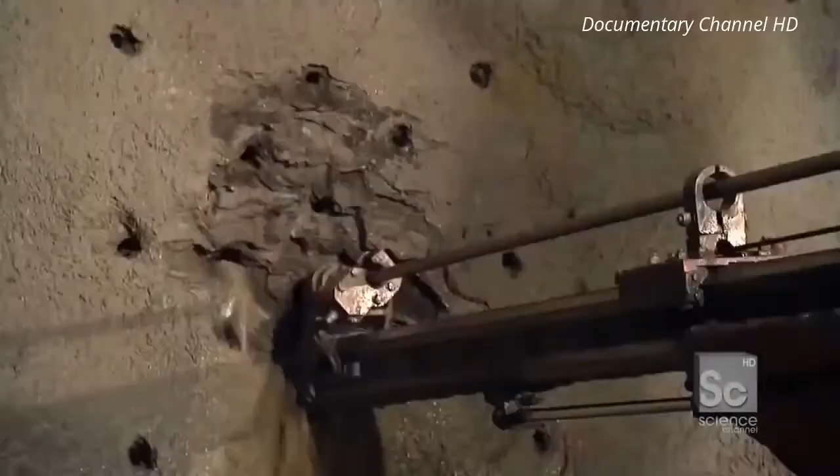A deviation of just 0.05 of an inch, about the thickness of a CD, could cause a misalignment of more than 2 feet by the time they break through. To realign the tunnel, they'd have to shave off tons of material from the existing walls, changing its shape and compromising its integrity. So as we speak, we are angling a little bit to the left and a little bit up.

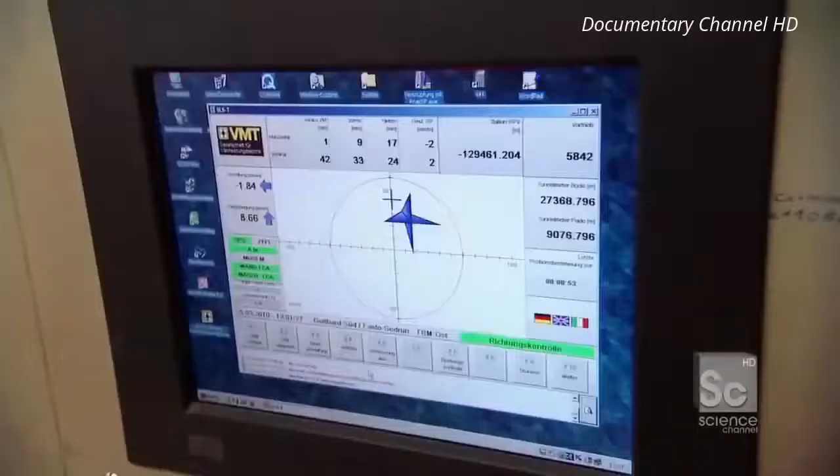During the 9-hour shift, Yannick checks and adjusts the TBM's heading more than 100 times based on real-time laser readings. He controls the horizontal and vertical path with the TBM's 2 massive grippers. They also propel the TBM forward, advancing it 6 feet with each stroke.

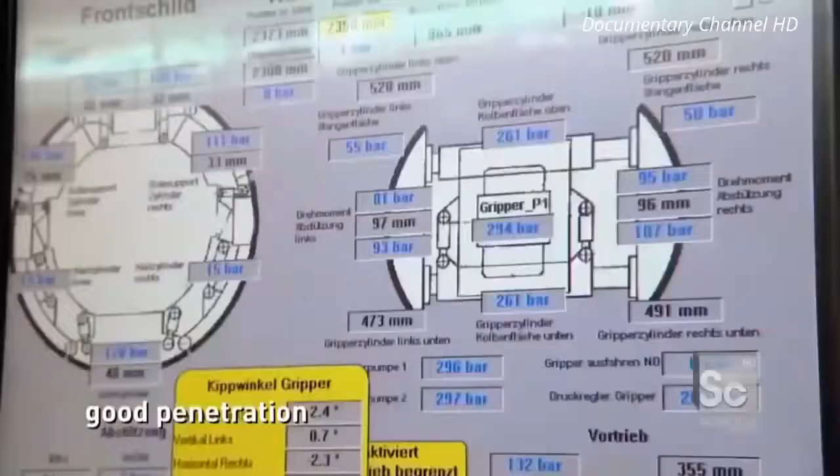This moment is perfect. We have power, good penetration. It's perfect. Yeah, perfect. We have good power, good penetration, good travel speed, beautiful looking rock. What more do you need? Other than maybe not being 6,000 feet under the Alps. But barring that, we are finally in good shape.

After a half-century of planning, Switzerland is just 5 years away from completing the longest tunnel in the world. And if all goes well, high-speed travel through the Alps will be possible for the very first time. Switzerland is famous for the Alps. It is what's defined the image of the nation for hundreds of years. But at the same time, these mountains have also transformed the country into a barrier, disconnecting it from the rest of Europe. So the historical challenge has always been to find a way to connect to other countries while contending with this enormous geological impediment.

And it's been an 80-year dream to not just get over the Alps, but find a way through them. And after 20 years of design and construction, they have just about made this dream a reality. And if you come to Zurich in 2016, you can hop on a train and be in northern Italy in just 2.5 hours. And all the while, travel right through one of Mother Nature's biggest obstacles.